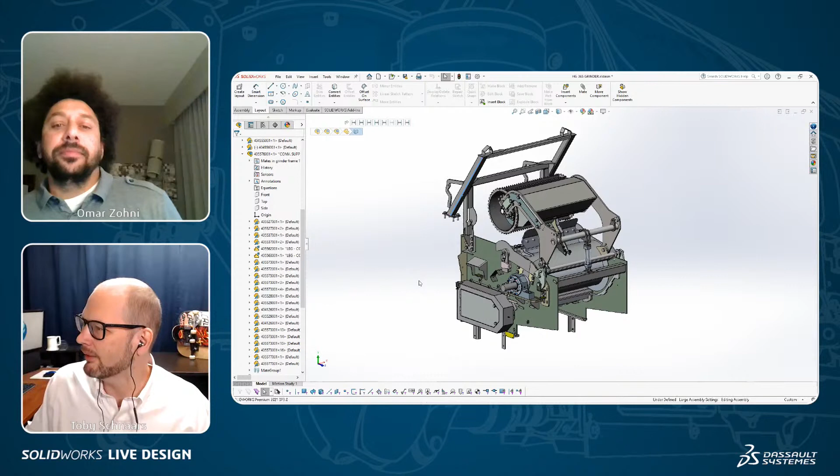I don't know what this looks like to me. It looks like maybe an old printing press or something. Yeah, so it's actually a wood grinder, right? So the intent is the wood gets fed in up here, and this thing can pivot depending on the size of the wood, and then it gets ground down. Okay. I like it.

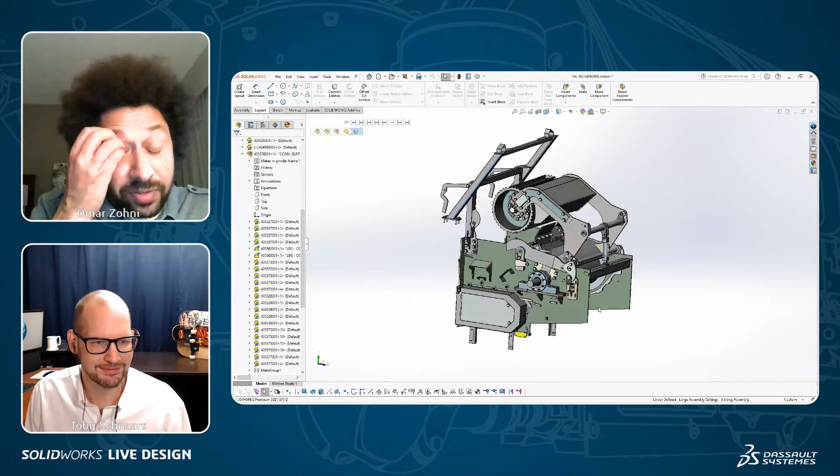And what we're going to be looking at specifically is just one of the components, right? So this arm right here is pinned at a couple spots. It's got a couple hinge constraints, meaning it can rotate. It can't really move in the X direction, so back and forth. And then it's got a known maximum load of, I think it's 2,800 pounds, that gets applied to it. So we're going to break that one individual part out and do some analysis on it.

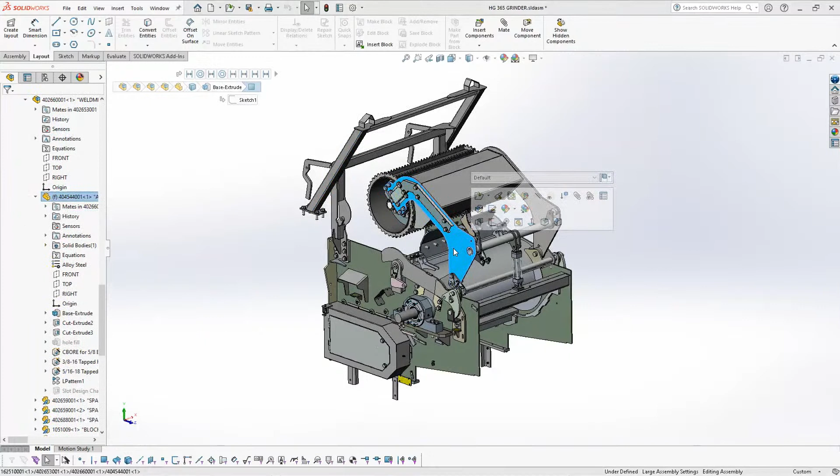And maybe you can just highlight the arm you're talking about again. This guy right here. Okay, great. So we're going to find out what we can do to minimize the mass of that part. Yeah, and so again, we're really going to be talking about the capabilities on the 3D Experience platform and how you can leverage your SolidWorks CAD geometry and the parameters to drive the design. So let me get out of the full assembly, and let's pull up the arm.

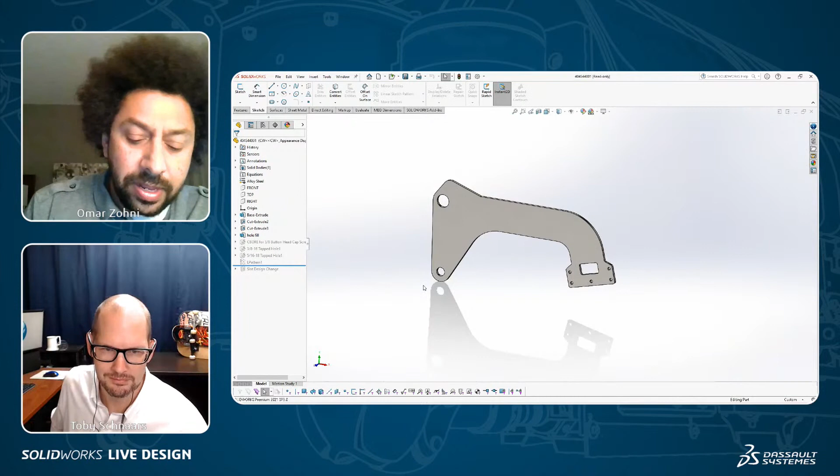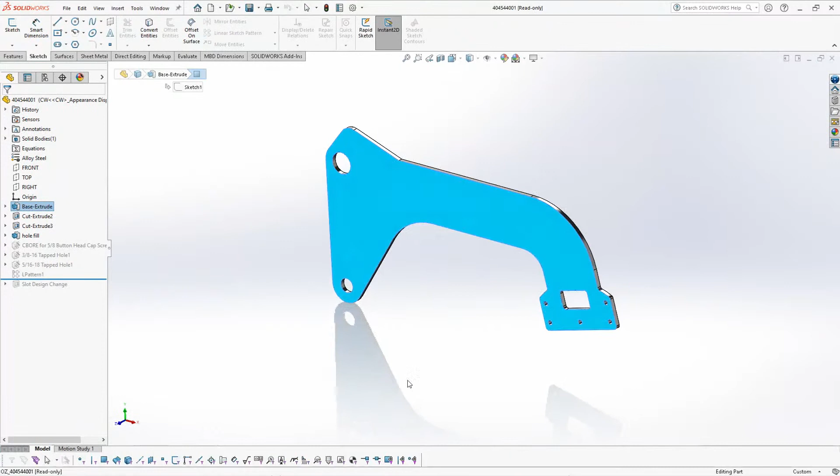So this is the arm we're going to be looking at. Again, there are going to be a couple hinge constraints on these cylindrical faces here, meaning that they can rotate around the hinge. We're going to put a constraint on one of these faces that says it can't move in the Z direction, so kind of normal to the face. And then there's going to be a remote load that's connected to these interior faces out at a distance of about 2,800 pounds.

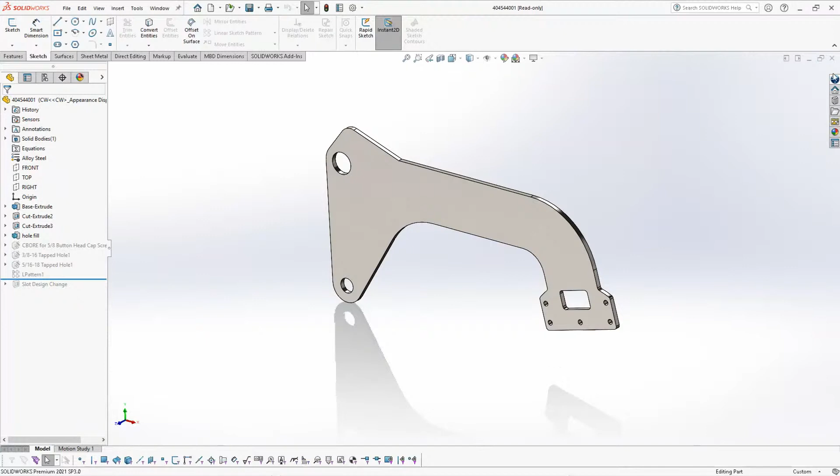And so, Toby, I'm just going to make the assumption that people probably haven't used a 3D Experience platform and haven't leveraged SolidWorks geometry. The integration between SolidWorks and the 3D Experience platform has been getting stronger and stronger. So it's very easy to just take this part, and you can see that I'm calling this thing revision A. A bit of a spoiler alert: there's going to be a revision B that we work on after we take a look at some of the results from Rev A.

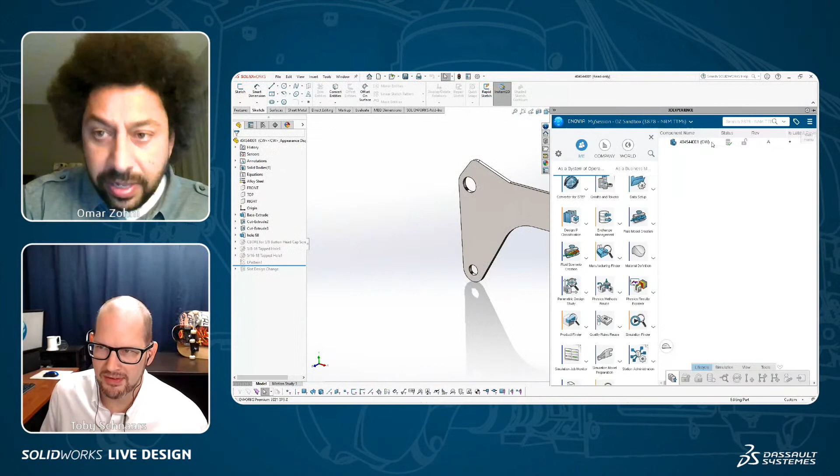But really, you just save this part to the platform, and then you can go ahead and open the part using any of the relevant apps. In this case, we're going to be using the mechanical scenario app, which is just the SIMULIA app that we use to define our finite element analysis. So you're saying you're right within SolidWorks here, but you're accessing the 3D Experience tools over in the task pane, and that's giving you access to all the power of SIMULIA, based on what your company has.

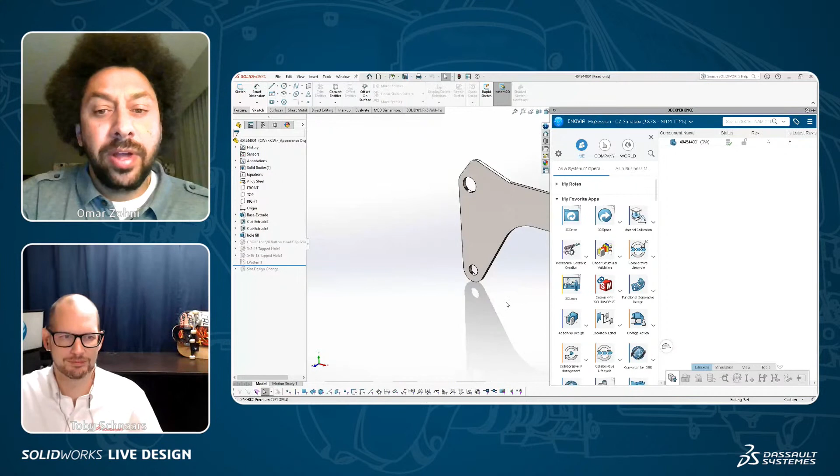Yeah, and so this can be a little bit busy, I apologize. Depending on what apps people purchase, that's what's going to be available here. And obviously, as an internal employee, we have access to a lot of apps. But the one that we're going to be working in today is the mechanical scenario app. So let's go over to the platform, and that is right here.

So this is, you guys can see that? Oh yeah, that's looking great.

Yeah, so I pulled the model over. I don't want to spend a ton of time going through finite element analysis, but this is a real simple setup. We're using an alloy steel. There's a really nice fully populated material library that comes with these tools that's got materials with fatigue data if you're doing durability analysis. It's got a full host of metal materials, some hyperelastic materials, both with and without plasticity behavior. So in this case, I'm assuming this guy is made of alloy steel, and I'm leaving the plasticity on. So if it does exceed yield, we would get some plastic deformation.

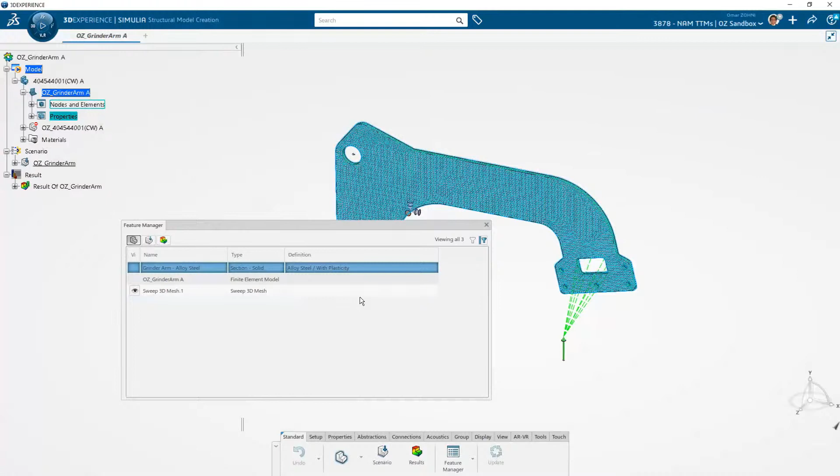And the other thing that you'll notice if you're a traditional SOLIDWORKS user is that we've got a brick mesh here. One of the things that people using SOLIDWORKS often complained about on the simulation side was the inability to create swept brick meshes. In finite element analysis, bricks can be a little bit better to use in some cases. Numerically, they're a little less computationally expensive. And for a structure like this, it just makes sense to use the brick elements.

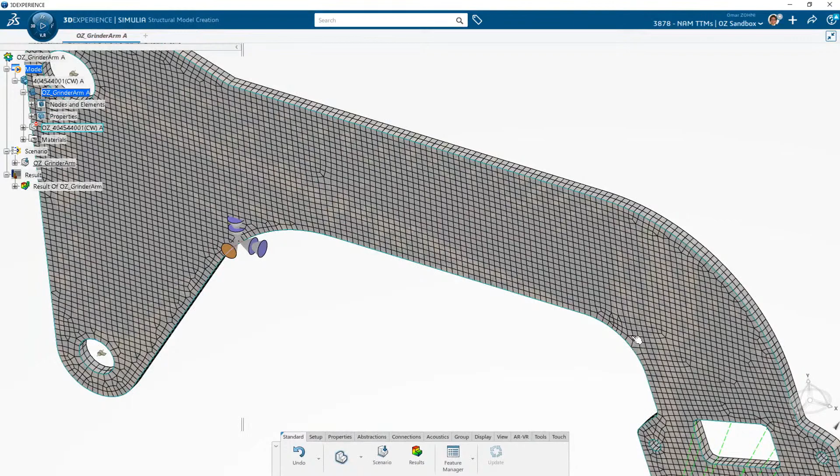So there's a whole host of types of elements available in SIMULIA that you didn't get with SOLIDWORKS Simulation. There are also a whole host of material models and element types. So not just brick elements, but some element types that are specifically good for hyperelastic. There's reduced integration. So there's a lot of bells and whistles available with the SIMULIA solvers.

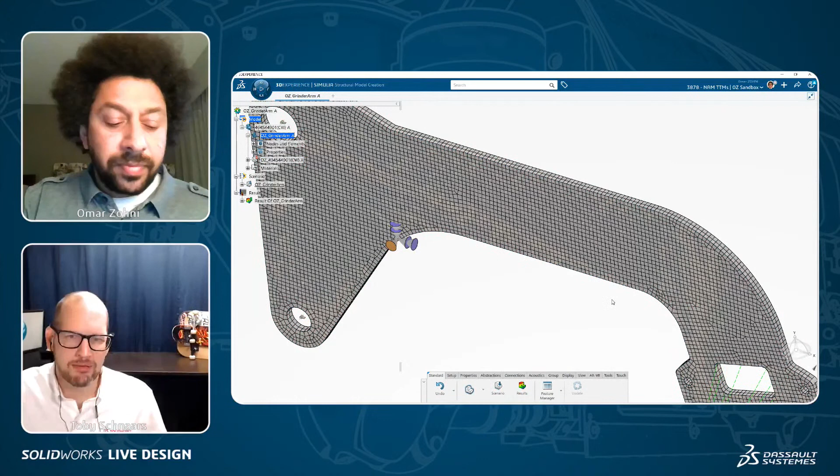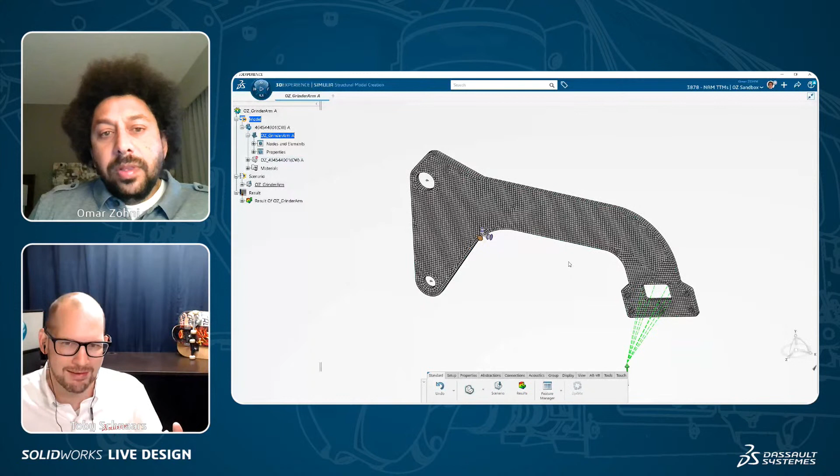Yeah, I would say that even just what you've described so far, normally if you're first getting into SolidWorks Simulation, you learn that you can deform a piece of geometry to the point of yield. As long as you don't exceed that point, it will, in theory, return to its original shape. But once you go beyond yield, all bets are off, and now you get into nonlinear studies and some pretty advanced stuff. But it sounds like a lot of that is accounted for right out of the gate with the 3D Experience library, because plasticity is included as part of the material definition for some of these materials. Is that right?

Yeah, absolutely. Anybody who's doing finite element analysis has probably heard of the Abaqus solver. That's the underlying solver we're going to be using here. This model doesn't have contact, but there are a lot of niche things that the Abaqus solver is very good at. Explicit dynamics is one of those things. Complicated contact modeling. So with SolidWorks, where you might have to specify a bunch of contact pairs if things are coming into contact, you don't have to do that.

So it automates a lot of that, whether it's plasticity behavior or contact. There are just a lot of things that are automated to make this a lot more user-friendly for more advanced types of simulations. And even with regards to the brick mesher, I mean, with a tetrahedral mesher where you've got a four-sided element, we would normally say on a thin model like this that you really want to have like 3 or 4 elements through the thickness.

When you're using a brick mesher, are you able to get away with only having 2 elements through the thickness? Yeah, you can get away with 2 or 3. And there's also some element formulations that would allow you to even get by with 1, in a case where you've got bending. So the brick elements allow you to get away with a little bit less through the thickness than

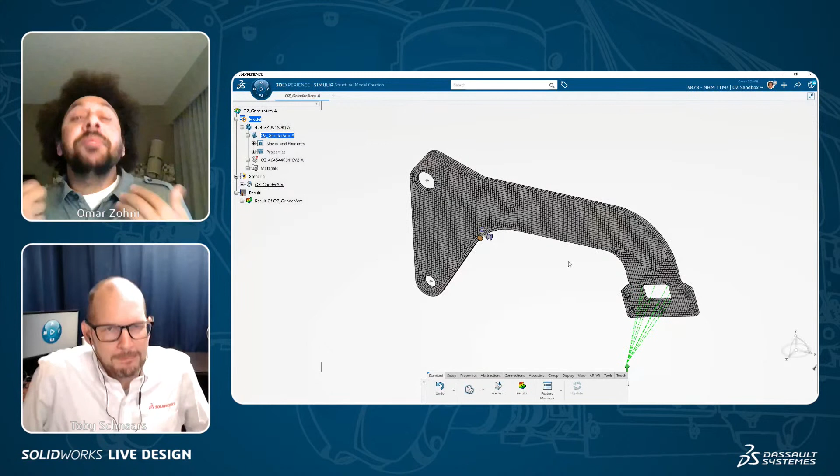a TET does. Now, the downside of bricks, and the upside of TETs, is you can mesh any generic shape with TETs and just fill it in. You can't do that with bricks, right? So there are situations where both of them make sense, and you can mix and match here. If you had an assembly, not everything has to be modeled with bricks. You can have parts modeled with TETs, parts modeled with bricks, and everything kind of works together.

Well, that's great. I see that SHAD in the chat was asking about some of the benefits of the brick mesher over the TET mesher, and I think you did a great job of conveying that. And I think it's also a nice opportunity to remind all of our SolidWorks friends out there that one of the big advantages of 3D Experience is that you get everything that you're used to in SolidWorks.

You saw that Omar had that beautiful SolidWorks assembly up and running, but then you're able to augment that with some great new functionality just by being able to hand off, right within the task pane in this case, to 3D Experience. And so now you're opening up the doors to all these amazing tools that you're not going to find in SolidWorks, that you're only going to find in SIMULIA, just by doing basically a right mouse button save in the task pane and getting to that new set of tools.

So I think it's always important that we share some of the things that we've discovered so far about 3D Experience in that context of, we can do a lot in SolidWorks, we can do a lot in simulation, but we can do even more in SIMULIA. And here's just a few examples of what some of those things are. Yep, absolutely. So you want me to walk through this setup a little bit more, Toby?

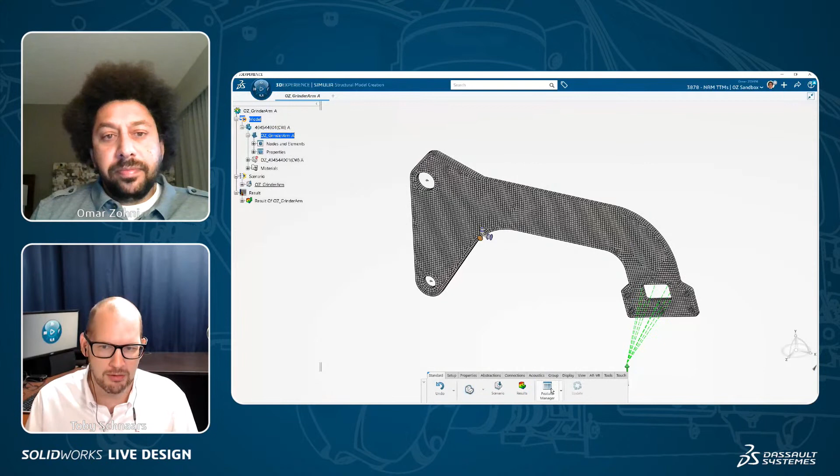Yeah, in my experience, the first thing you do is you assign material. I think you've covered that you've assigned material. Next thing you would do would be to set up the fixturing for it, right? Have you already set up the fixturing for this one? I have, yeah. And we can just kind of walk through that. So I've set up my scenario, and like I said, let me just highlight a couple of these.

So there are a couple hinge constraints, and you can see the face is highlighted in blue here. So there are 2 hinges. Now, how many degrees of freedom is that locking down when you assign that hinge restraint? So it's basically locking down all the degrees of freedom except rotation. It can only rotate about this face. Okay, got it. No axial translation, no deformation of the nodes on those faces, external from the axis. No, right, exactly.

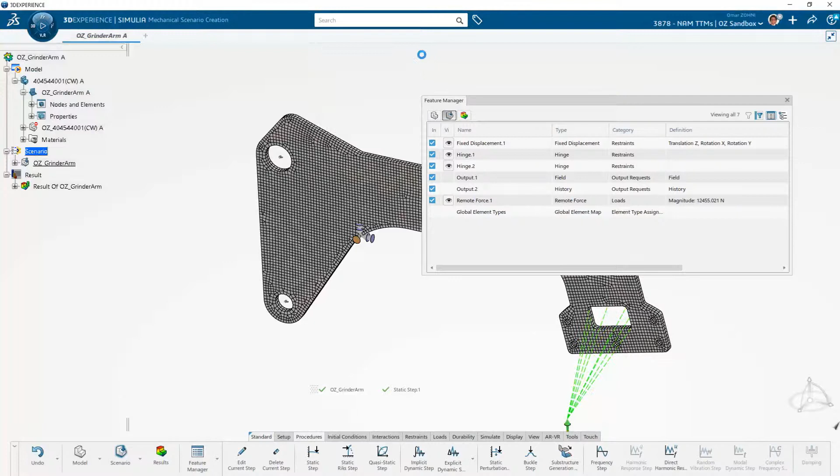And then really the only other important, well, there's a fixed, let me back up here. There is a fixed displacement on one of these faces. So there's a constraint that's basically saying this face has to remain coplanar, flat. Yeah, right. Exactly. And then we just have our remote force that's applied to these 5 or 6 faces that cut out at the bottom, and it's about 2,800 pounds. We're working in the metric system here, so it converted it to newtons, but I believe it's about 2,800 pounds. And we can see the direction of that force.

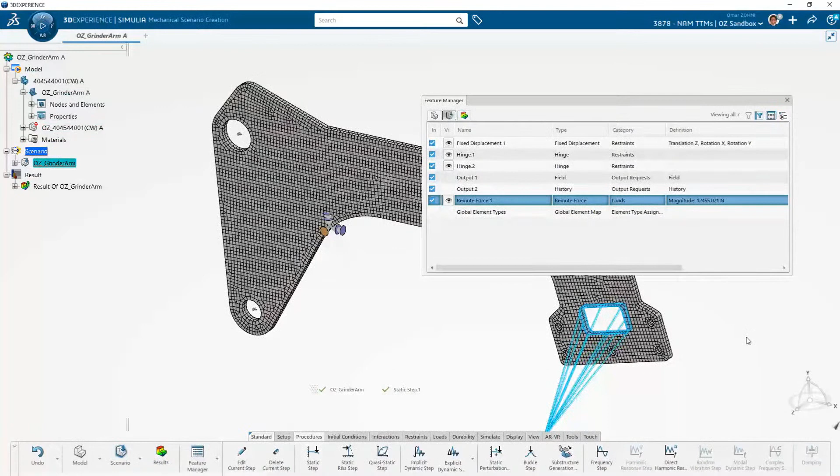Is that fixed displacement on that planar face because this thing is up against a wall, or what is that simulating? Yes, so it's up against some components that are gonna hold it flat. Okay, got it.

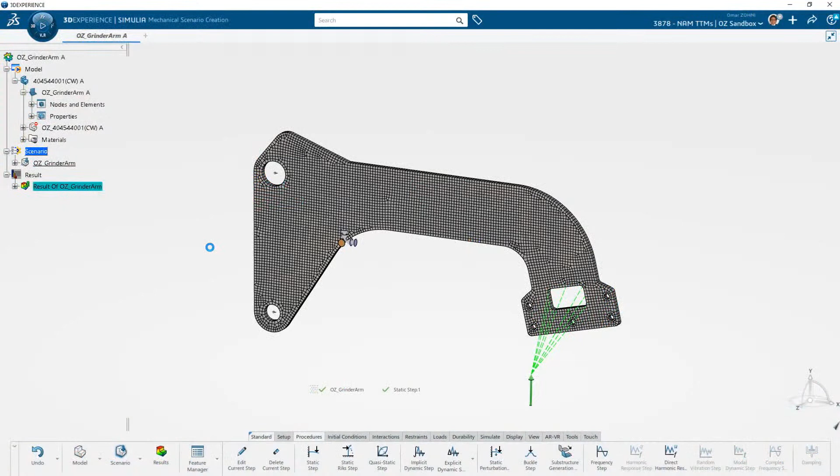Okay, really, that's it. So then we can go ahead and run this. And for the sake of time, I have the results here, so let's just pull up some of the results, because once we see the results, it'll make more sense what we do next and what we decide to do.

And these are just the pre-populated, like it automatically shows you von Mises stress, but sometimes people want to look at principal stresses or axial or directional stresses like sigma X, sigma Y. So all of those are available. It just depends on the type of industry that you're in. But a lot of times people are most interested in von Mises stress, so that's the one that gets plotted by default.

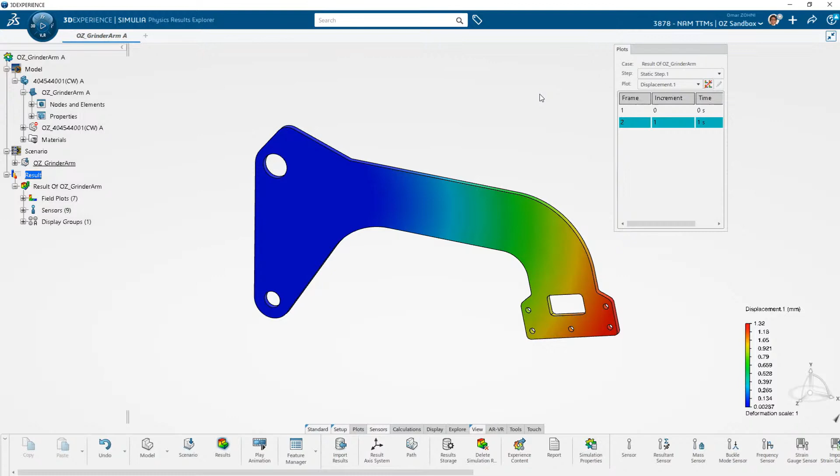But anyway, okay, so now we've run this guy. We can see that it's really over-designed. A factor of safety of 7 is just way too high for something like this. You could probably get away with a factor of safety of 2 or 3. And because we can see, if we look at the von Mises stress, this area here of low stress, a real simple thing that we could do to reduce the weight would be to go back to SolidWorks.

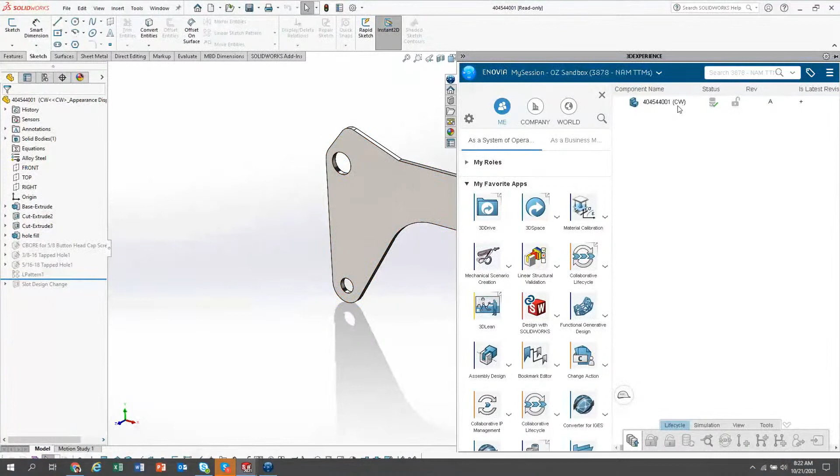See, and this is what I would do: I would end up going back into SolidWorks and trying to sketch that same shape, and then just remove that shape. Just try and get it close, and then I have to set up the whole study again and run it again. Yep. So what's nice is we don't have to do that here.

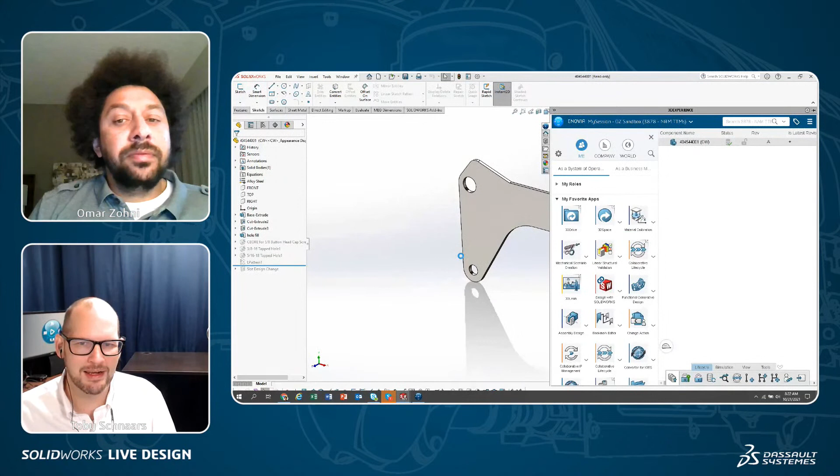So I'm going to go to my revision B. Okay. There's a little bit of data management in the cloud here, one revision for another. And you can see what I've done is I've added a slot. And the slot has a couple parameters that we can vary. One is the width, one is the location, which is how far down it is from the top, and the other one is the length.

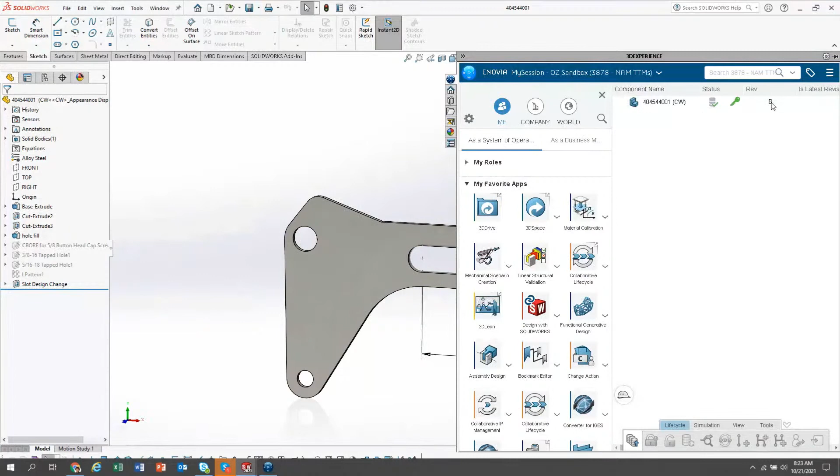So I kind of guessed at what the width, the location, and the length should be as an initial. And what I'm going to do is run a parametric study and vary those to see which one meets my design criteria while also minimizing the mass. So we got my Rev B now. Again, I would do the same thing, kick this up to the platform. It's going to know that it's a revision B.

And after I've run this analysis, there's a way that I can say, look, I want to create a new revision of this analysis, and it will make all of these Bs, and then I can just replace it with my B revision. Oh, wow. Yeah, so I don't have to really re-set up the model. I just copy that A rev to a B revision. So let me just pull up the guy. Yeah, I could definitely see that saving time.

Yeah, tons. Obviously, I've been using these products for quite a while, so I have a lot of models here in my space, but I can filter it down to my simulation content. And you can see, oops. So that's my Rev A.

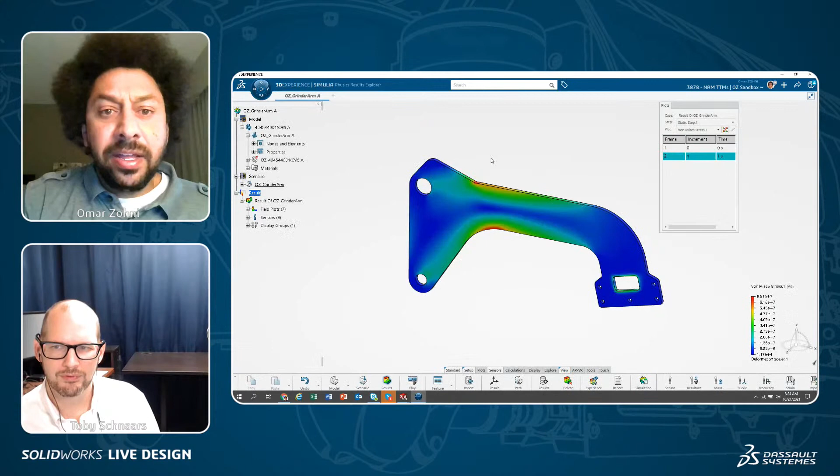Oh, crap. Sorry, guys. Oh, all good. I swear I've done this before.

It's all good, man. And this is interesting. So ultimately what you're saying is that you're going to be taking those parameters that you specified, like the slot width and the slot location and the slot length, and then you're going to be essentially pitting them against some design criteria. Can you pit that against like factor of safety?

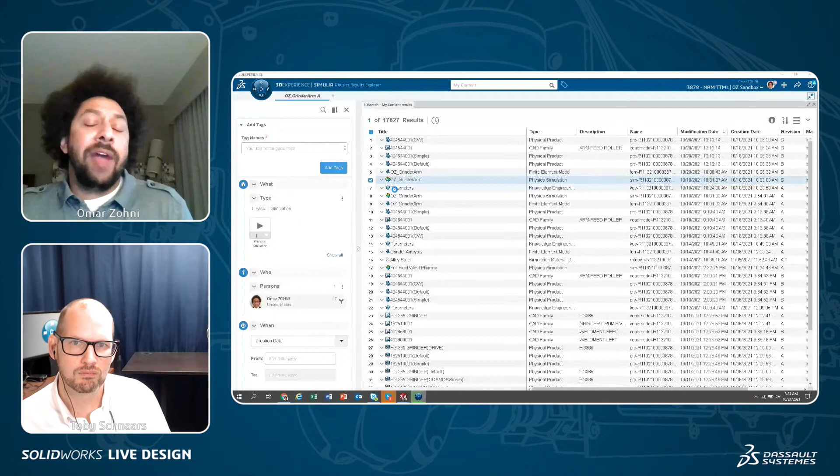Yeah, absolutely. So basically, you flag any criteria that you have to meet. So for a structural analysis, it's going to be things like factor of safety, displacement, stresses. It could be frequency, if you run a vibration analysis. It could be temperatures if you are running thermal analysis. It could be a combination of those, right?

Oh, so for a temperature one, you could figure out what the optimal wall thickness is in order to prevent certain temperature from getting through, or for insulation purposes. Yep, absolutely. Wow, so that would be helpful.

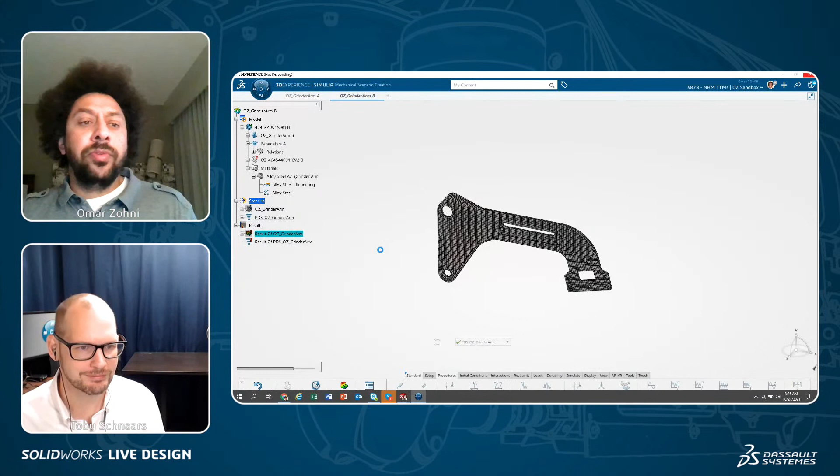Let's pull up. So again, all I've done is I've replaced it with a revision B. Oops. I don't have to reset up the simulation. I just basically go ahead and run it.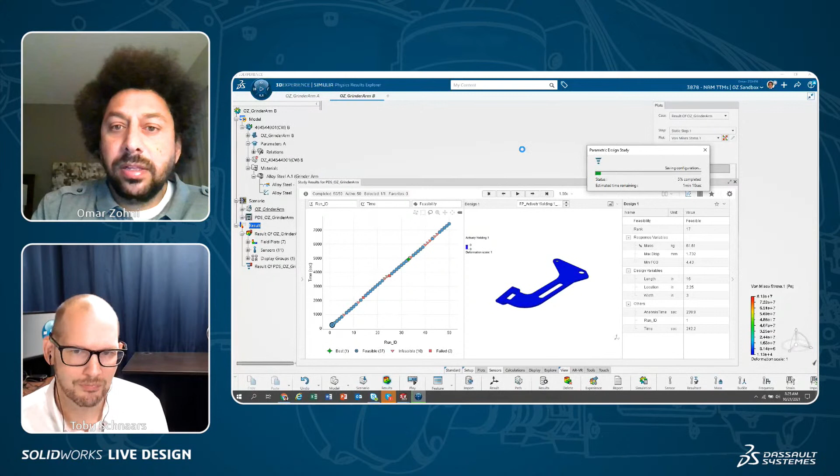So maybe while this is running, you could just address real quickly, what's the difference between this parametric design study and a generative design? So a generative design, at least when I hear that, I think topology optimization, right? Where you're really not as constrained by geometric parameters. You're just kind of saying in this space, this body can reside. Here are the forces it's going to see, and come up with whatever shape you can to meet the criteria, right?

Yeah. Okay. So I think I've seen them before, where they'll say, I want to make a bracket to hold up a shelf, and you just say it's held here and it's held here, and then it creates almost an alien structure that's holding it up, a super crazy freeform structure. That's the result that you get from a generative design, right?

But that's not really what we want in this case, because we're a lot more constrained, because this is a piece of machinery. It's one piece in an assembly. It has to fit in with other pieces. So in this case, it would be more appropriate to do a parametric design study. Absolutely, yep. And I'm just gonna solve this again.

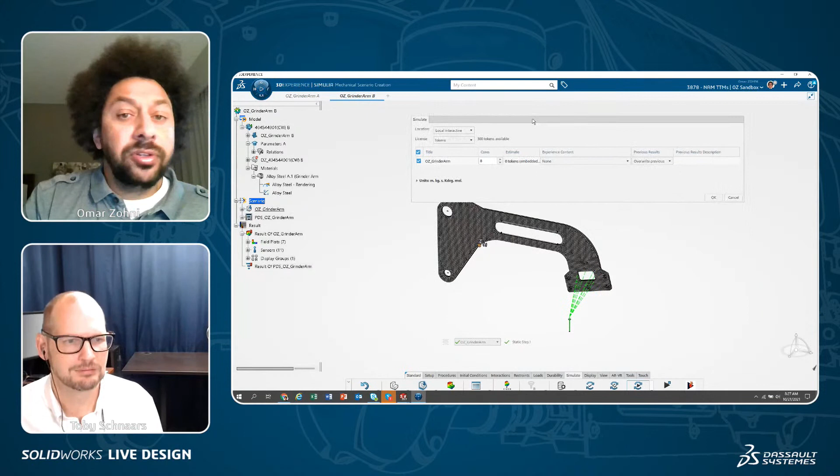It looks like sometime in the last day or two when I was working on this, the data for the simulation got mismatched from the actual SolidWorks model. So this is great, though. You guys can see exactly how long it takes. All I've done is hit update, which just updated the mesh to reside where the geometry is. And now, right out of the box, first of all, you can solve on 8 cores with these products. Okay, I like that.

Yeah, and those 8, you can run locally, or I can run it in the cloud. So if you don't have 8 cores on your machine, or your machine is a little slow, or you just don't want to take up the computer resources because you want to do something else, I can just say I want to run in the cloud, again on 8 cores, default out of the box. And if you wanted to run on more than 8 cores, then you would have to buy computing credits or tokens.

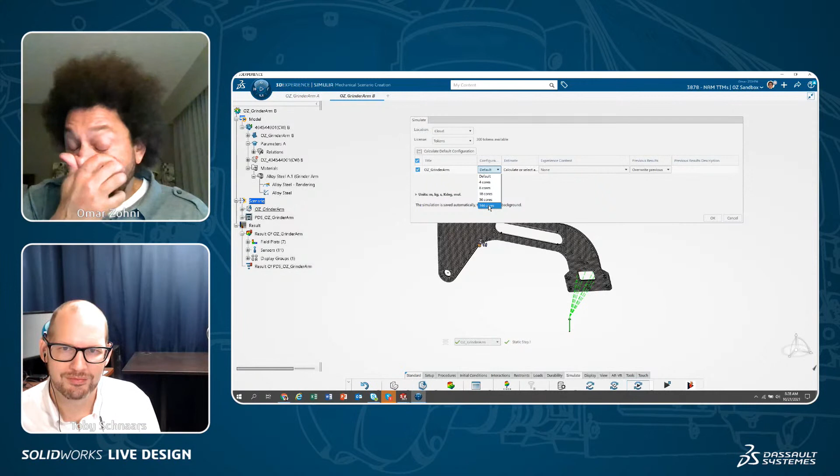This is a way to really speed up your simulation times, especially for complicated models. For a model like this that's not super complicated, just a linear analysis, you're not going to get a major speed up. But if you're running an explicit dynamics analysis or a really complex nonlinear analysis, running it on more cores is really going to speed it up. Yeah, running on that entire assembly. I got excited when I saw that 144 cores.

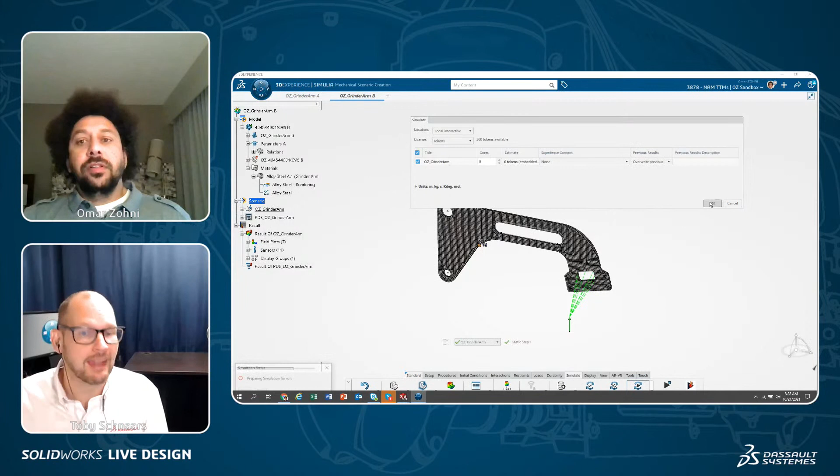So what you're saying is that anybody who gets this product gets access to the 8 cores, you're able to do your solving, it's all good. But if that's not enough for you, we do have options to help you upgrade to get access to more cores. Absolutely, yep. Okay.

So I just fired this off and asked it to solve again, and within 30 seconds, 45 seconds, this thing is going to run. And again, I'm running it locally. Now, the assumption with these solvers is that everything's nonlinear. So if you've used SolidWorks Simulation in the past, you know you can kind of control the times or the stepping in a nonlinear analysis. You can do the same thing here, but I think I'm just asking it to solve it all in one step. This is a pretty simple analysis here.

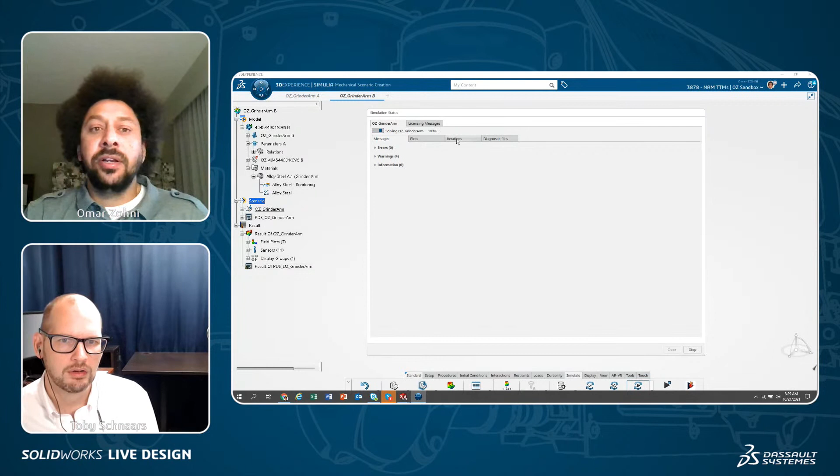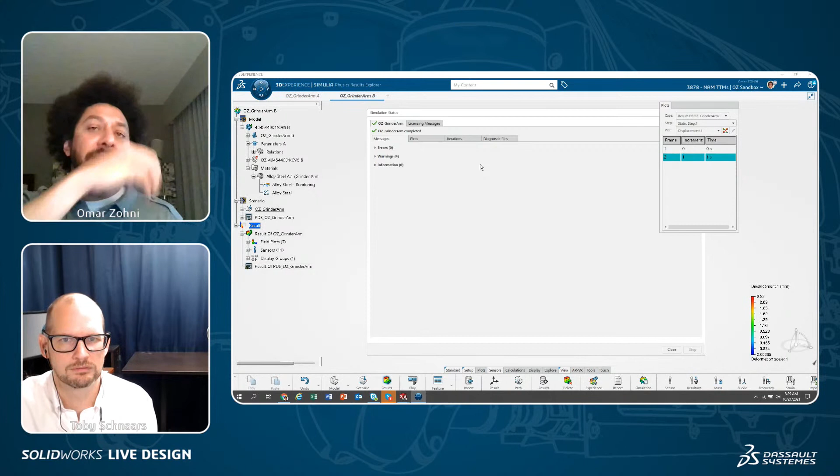So what you're saying there though is that when something solves as a nonlinear study, you're assuming that time is a factor? So with nonlinear, there's kind of a pseudo time, right? So time represents kind of percent of load application. A lot of times with nonlinear analysis, because it's path dependent, if you apply 100% of the load all at once, it's going to look very different than if you apply 10% of the load incrementally. So the response is just not linear.

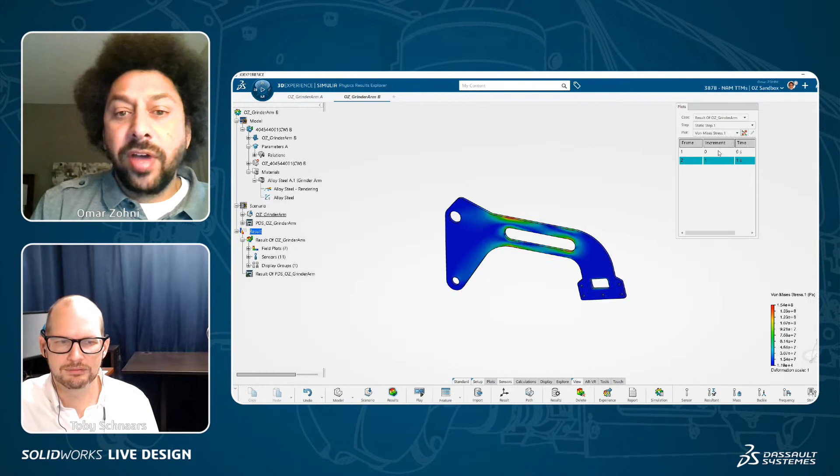Got it. Okay. So then you have the ability to, like, a time of one. We're not really running this in a transient nature. A time of 1 second just means 100% of the load has been applied. Right. Okay, I got it. All right, so here's our results. I don't know if you guys remember, but the displacement I think was about 1.3 in the model without the slot. But we could look at von Mises stress. We can look at factor of safety. So you can see my minimum factor of safety now is down to 3.07.

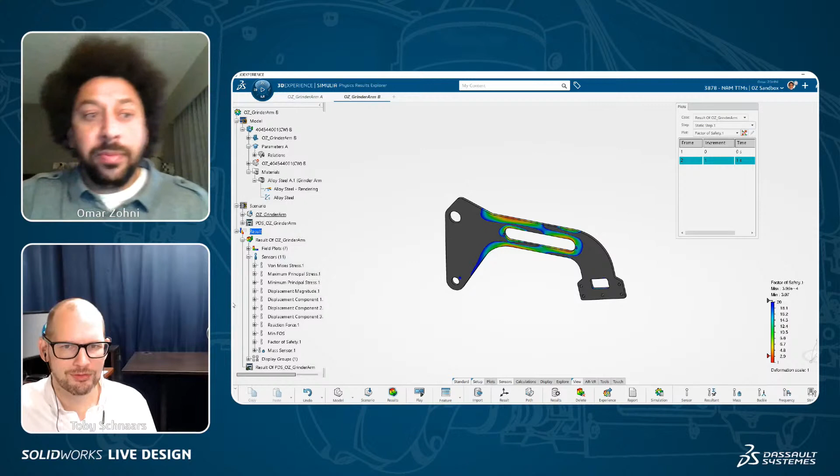But basically what you do is, you run your parent study, right? This is the model that I want to do a parametric study on. And there are a bunch of sensors that get created by default. And these sensors are basically what are used in your PDS study, your parametric design study, as design variables. Now, also, there's what's called a parametric bridge. And you can see that's where my location, my width, and my length are. So any parameters that I set up in the SolidWorks part are going to be ported over here. These are the parameters I'm going to be using to run that parametric study.

Sure. And you can see I've got sensors for the minimum factor of safety, my maximum displacement, and there's also a mass sensor, right? So those are the three that I'm really going to be focusing on when I run my parametric study. Okay. So again, you run your first analysis, and then you create what's called a parametric design study. So I'm just going to come back.

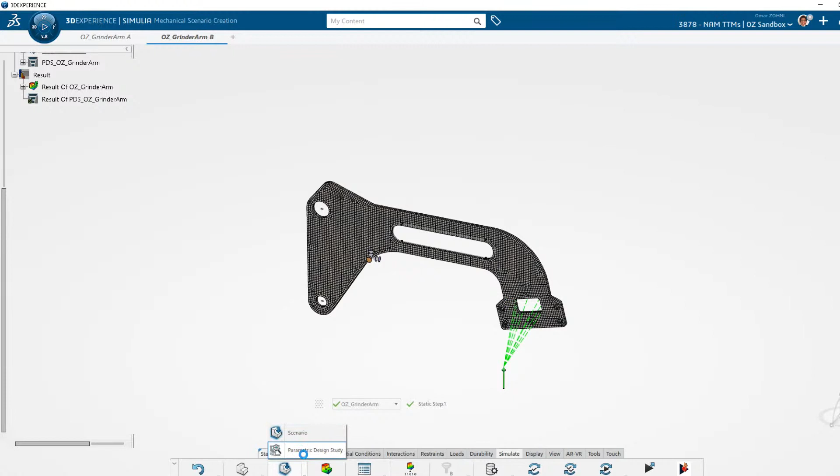I don't want to get lost in some of the minutiae here related to the platform, but these are the different apps, what's going on here? Sorry, guys. That you're going to be hopping through. So there's a modeling app, a meshing app, and then in the scenario app, you can see there's a parametric design study. So I'm just going to activate that parametric design study. I've already got this set up, so let's talk a little bit about it. I've specified my design variables, location, width, and length. I'm specifying the min and maximum, and I'm putting in a step size.

Now, you don't have to put in a step size. If you don't put in a step size, it will, not randomly, but it will kind of take a guided approach to looking between your min and max values. Okay. But oftentimes, it's not like you're going to build something and want the location to be 2.1375, right? Oftentimes you want it to be whole numbers.

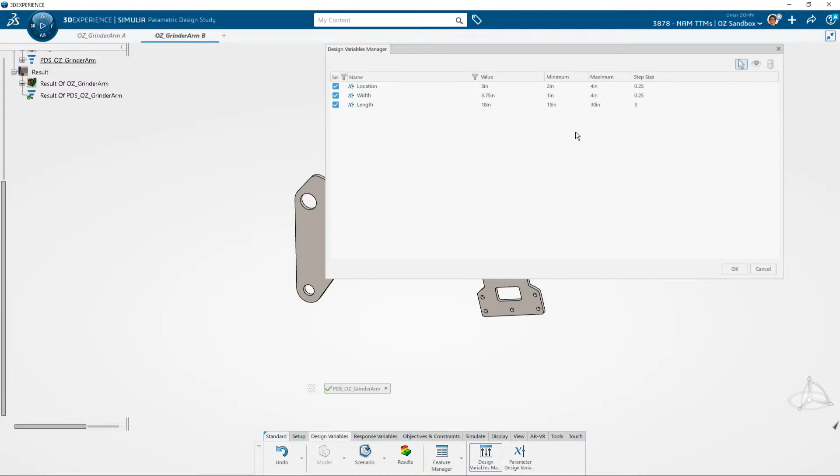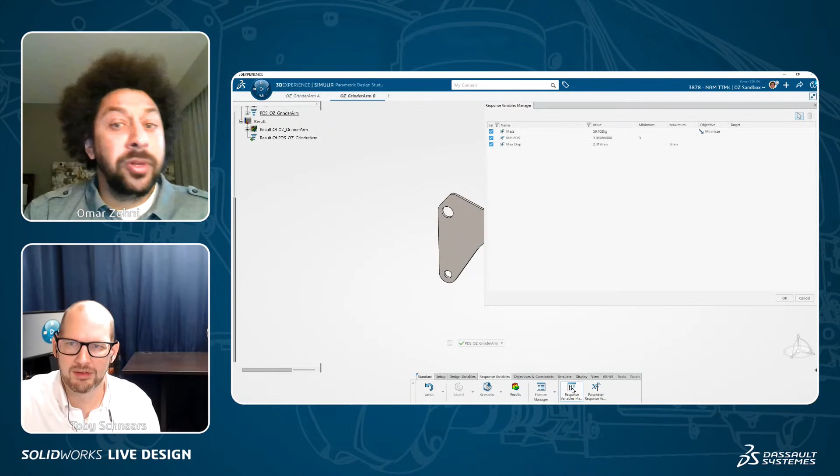Yeah, like in this case, maybe it'll start in the middle. So maybe it'll start at like 3, and then it'll go down to 2.75. Then it'll go up to 3.25, then 2.5, then 3.5, and kind of figure out the optimal, I guess it's going to be doing a combination of all 3 of those variables. Yeah, absolutely. So you've got those 3 input variables. Then my response variables, I'm just pointing to those sensors, right? And what I'm saying is, look, I want the minimum factor of safety to be 3.

I'm not going to limit what the max is, but there can't be a value under 3 or else the design is not feasible. And I'm also saying that I want the maximum displacement to be less than 3 millimeters. Okay. So those are 2 design constraints, right? If any of the runs don't meet that criteria, then it's going to highlight it in red and say that they're not feasible.

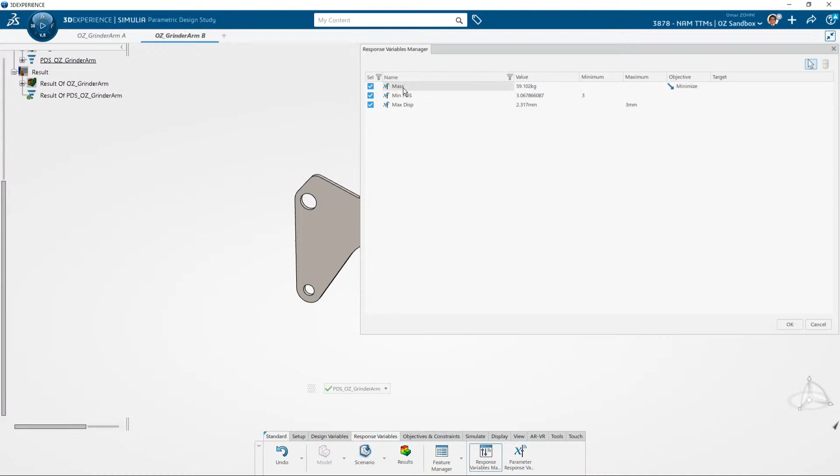And then the goal is to minimize the mass, right? Exactly. Let's get this thing as light as possible. Yep. And then in our simulate tab, we could specify how many points we're looking for. So in this case, I told it, look, run 50 points. And let's take a look at the results.

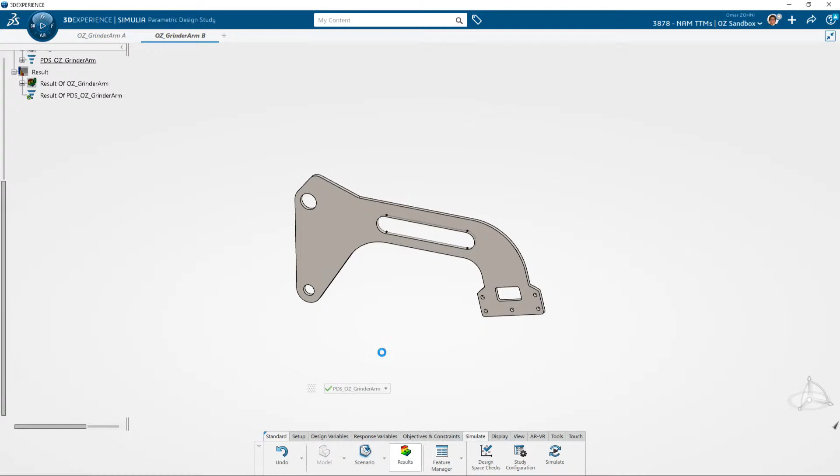Looks like you might have to run it again. No. That would definitely take way too long. Got to bust out that 144 core credit.

Yeah, so here we go. This kind of interface comes up as you're running this simulation, and it's very, very cool. So you can see here are my 50 points. We're going to configure this a little bit, but there are 37 points that were considered feasible. That means they meet our requirement.

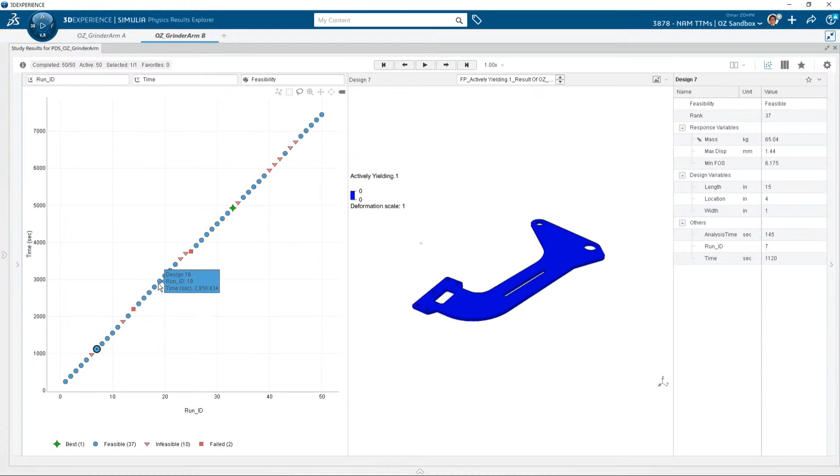And if I click on any one of these, so let me just click on one. The slot changed. I saw it. Yeah. So if I click on any of these, I'm going to have the results that I'm interested in. So up here, you can see it's changing. It's showing me what the maximum displacement is, the minimum factor of safety, my design variables, what they're set at. And I can walk through and take a look at all of those plots.

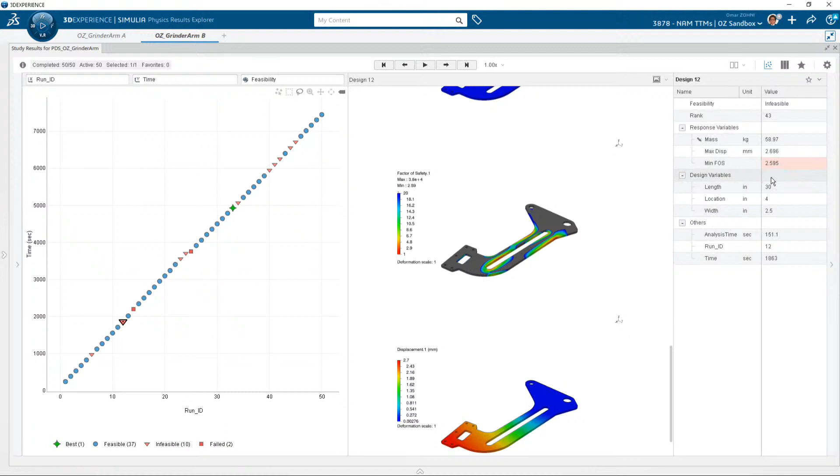So here's my factor of safety. I can see my minimum factor of safety is 3.44. So those are for all the runs that are feasible. Now, if I click on any of them that are infeasible, one of these response variables is not meeting the criteria, right? So I think I said I want my minimum factor of safety to be 3, and this is only 2.5, right?

And then what's the difference between that and failed? Okay, so failed means that there was a problem with the geometry update. So maybe it was deleting a face, or the width was too big, so one of these faces went away. So failed is different than infeasible. Failed means something happened and it didn't actually run the simulation. Because some combination of those dimensions at their maximum ranges caused it to blast the whole face off or something like that. Yep. Okay.

And then there's infeasible, which means it didn't meet one of the criteria. Feasible, it meets all the criteria, and then it highlights what it feels like is the best. Okay. Let's see it. So it's the big winner. So design number 1, the weight was about 61 kilograms. I think in the original design without the slot, it was 66 kilograms. Okay. So design 1 with the initial slot 61 and then down to 58. So it's cutting 5% of the mass out just in the slotted configuration, which if you're making a bunch of these, it matters, right?

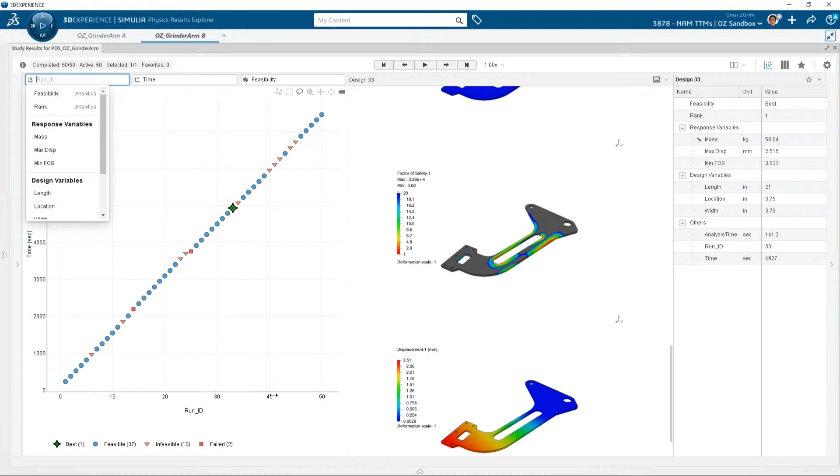And the other thing that's really cool is, right now the x-axis here is just the run ID, not really useful, right? You don't care if it's run number 1 or run number 50. So what I can do is change that x-axis to, let's do maximum displacement. Oh, wow. And then you can see, anything over here fails because the maximum displacement is too high. And then I can change my y value to something like mass.

So it's cool, right? You can see all these guys that are red are failing. And you can see generally as the mass goes up, the displacement goes down. Which for this one single variable we would expect, but I could see there being other studies where that would be super insightful. Yeah. And now I'm plotting maximum displacement and minimum factor of safety, right? So here, this is the red zone, where it's violating one of those two, or here where it's violating both. Mm-hmm.

And then here's our ideal point. And then on top of that, I can walk through any of these. I can right-click on any of these and say, look, I want to add that to my favorites. If I want to compare a few of them, maybe this is just a little bit too close to the displacement or the minimum factor of safety, right? It's super close to 3. So maybe I don't want to use that one. So I can flag a bunch of these.

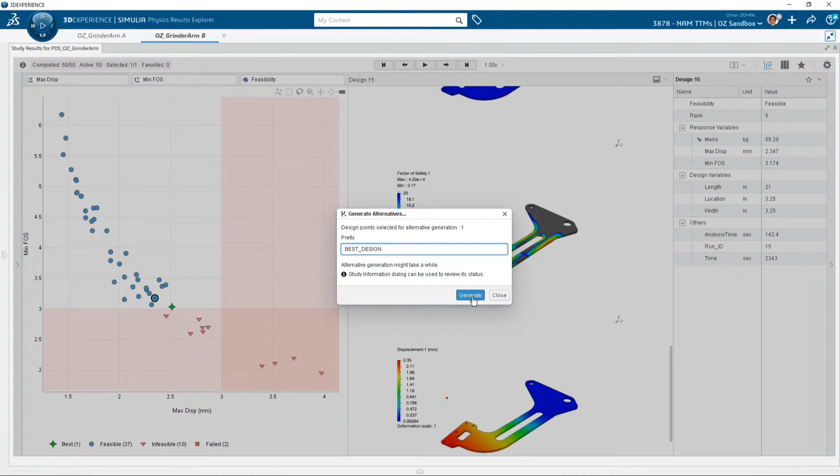I can also say, look, I want to generate an alternative. And what that will do is, I can add a prefix, so this will actually generate that geometry that I can open in SolidWorks. And then if I wanted to, I could actually replace the part that's in the assembly with this optimized design, right?

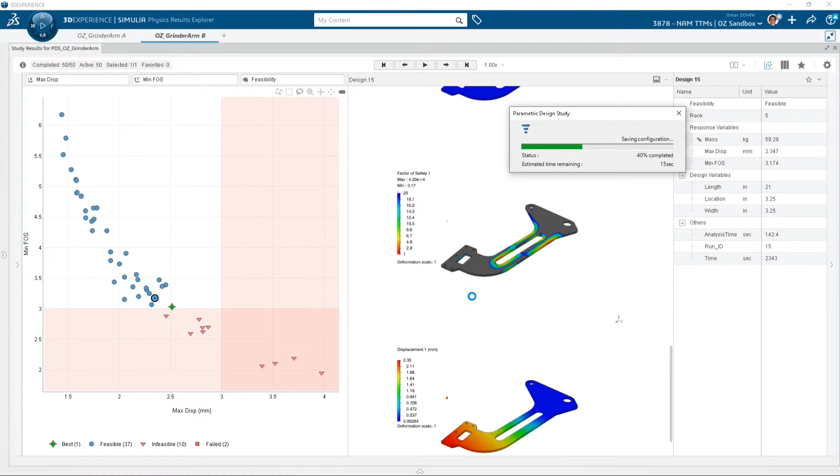So really powerful technology. And again, all integrated with SolidWorks, right? So really easy for me to go and push these changes back to SolidWorks. If I make a change on the SolidWorks side, it's easy to push those changes back up to the platform.

So at this point, I think this is what you just said a moment ago. I just want you to reiterate, now that you've got that design, you've determined which one is the best, what does it look like? You don't have to necessarily do this, you can just talk me through it. What does it look like to then get that geometry back into SolidWorks? So that's what's going on right now. You just right click on the design you're interested in and say you want to generate an alternative.

Okay. And that will generate, it's called a physical product on the platform, but that physical product can then be read back in to SolidWorks. And we could replace the existing arm with this version of the arm. Right back into the assembly. Right back into the assembly, yeah. Wow. Yeah, I could definitely see this being a huge benefit.

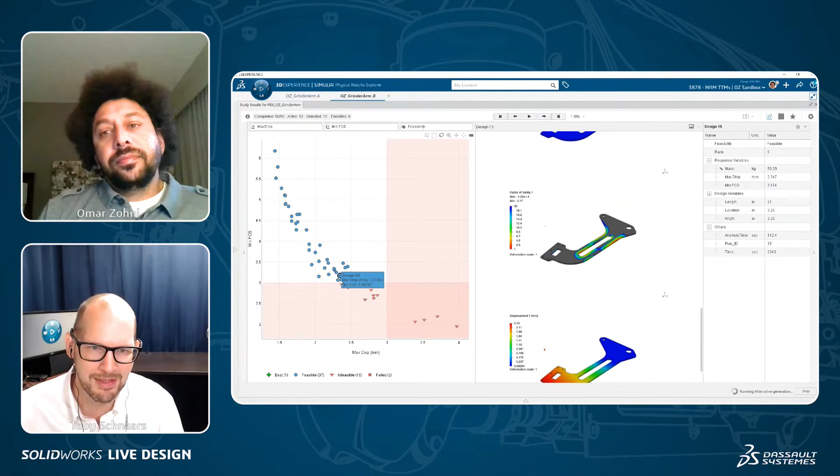We had a question from Brian earlier. He was asking a little bit more about the difference between the brick and tet mesher. I think he did a great job answering that. And Eric is very impressed by 144 cores. Says more power to the shields.

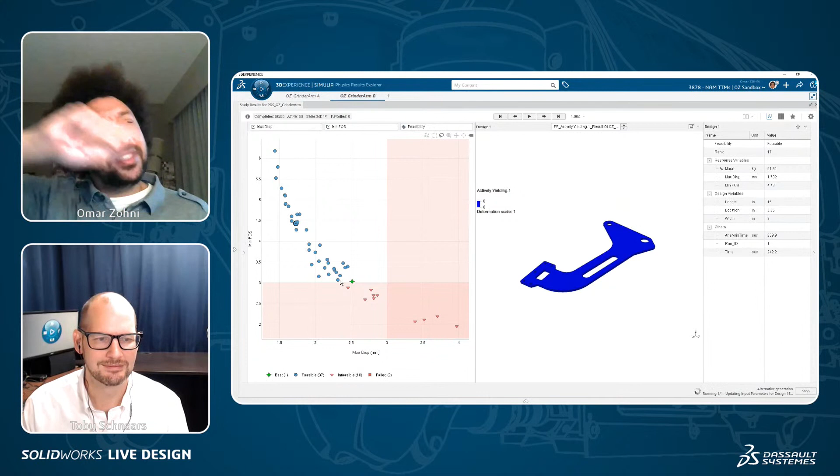Yeah. And what's great about the SIMULIA solvers is they're really written to take advantage of multiple cores. With the SolidWorks Simulation solvers, you can utilize as many cores as you have on your machine, but after about 6 or 8 cores, you really start getting diminishing returns. But with the SIMULIA solvers for large models, if it's taking 20 hours to run on 1 core, if you throw 20 cores at it, it's going to take about an hour.

Now, there's a little bit of time that you lose when it's breaking up the problem to run on those 20 cores. But in general, the solve time is going to be very linear as you increase the cores. Okay, that's good to know for estimating the appropriate amount to select.

Yeah, and this is just an example of structural analysis. You can also do this with fluids packages if you're doing CFD, which can also take advantage of this to do parametric design studies linked with SolidWorks.

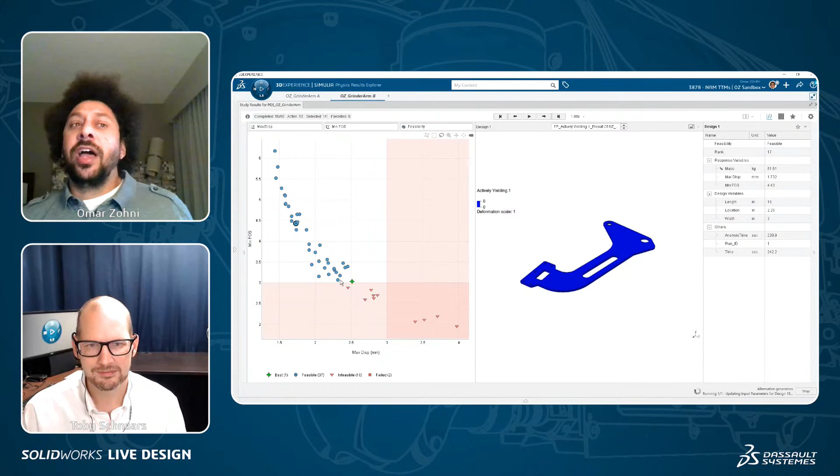Like I said, it's an interesting time to be a simulation person in this space. We're starting to interact more with the EMAG groups, so there's some EMAG products on the platform. You're saying on the platform, yeah. Radio magnetic frequency, that type of stuff. Is that what you're referring to?

Yep, absolutely. Looks like Ramesh is saying hello. He should be watching this, right? Sorry about that. I should have turned off my Skype.

So, with regards to that, it's just interesting you said that right when the question came in from Brian. He said, "Can you use multiple different physics engines to come up with these design constraints?" So, for example, could you do a flow type of study and a structural analysis and have both of those be constraints in the same parametric study? Yeah, so great question. I think right now, unfortunately, they have to be separate, but that is definitely a capability that's coming.

So you could have multiple structural analyses that kind of dictate. Oftentimes you'll do a frequency analysis and have a frequency constraint. Like you want to make sure that the minimum or the first natural frequency is above a certain value. And then you could couple that with structural, like a factor of safety, displacements. And even thermal. Something like what you described at the beginning of the show, one of your first jobs.

If something's up on an airplane and the airplane's vibrating at a certain frequency, you're going to want to make sure that your structures avoid that frequency. Is that kind of what you're talking about? Yep, absolutely. Okay. So frequency analysis could be combined with structural at this point, because they're all kind of in the same solver, in the structural domain, right?

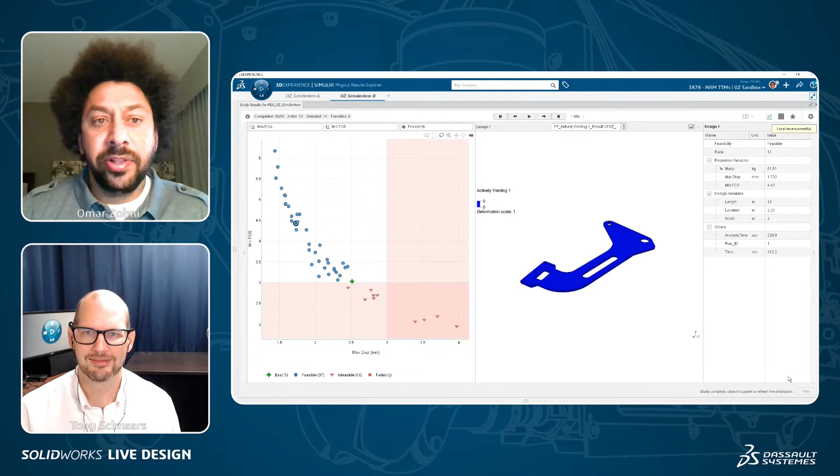So where do we go from here? So like I said, the integration with SolidWorks is getting more and more powerful, and we're getting more and more capabilities. Again, this was just an example of a structural analysis. You could do it with flow analysis, and we're gonna see more and more of those types of capabilities. Well, I can't wait to see what comes next.

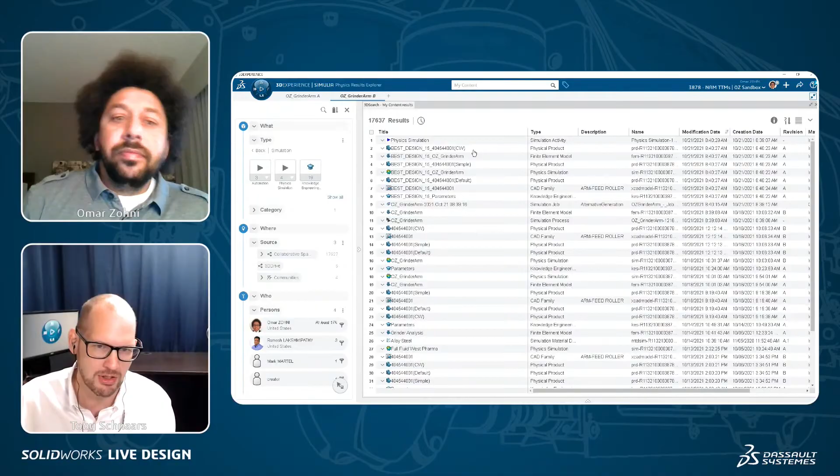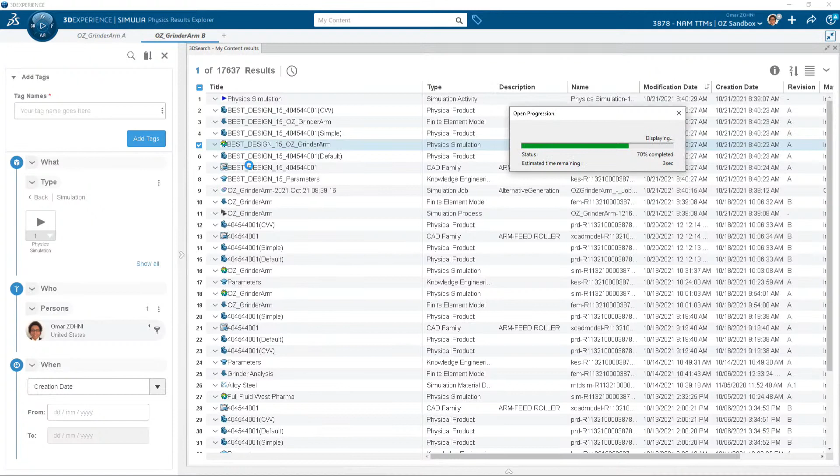Yeah, what I was gonna say is, you can see I told it to generate that best design, or the design alternative, and I added a character string, best design, at the front of it, so you can see what it did. Let's open this. So it actually sets up the simulation, because you only have access to those predefined results in the PDS study. So if I want a more granular look at that specific design, it creates a physics simulation, an FEA model for that particular geometric configuration.

So you're saying it only generates that FEA model, or it generates that and the geometry we need in SolidWorks? It generates the FEA model. It also generates the model in SolidWorks, right? Okay. So great.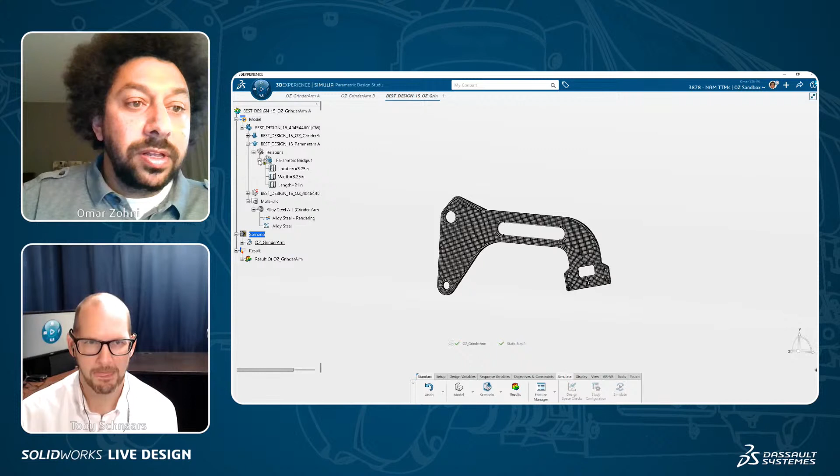Yeah, you can tell I have a real bias to SolidWorks. I just want to get everything back into SolidWorks. It's all I care about. Yeah, so let's go back to SolidWorks. It should be. I haven't tested this. It's always nice to just do things on the fly.

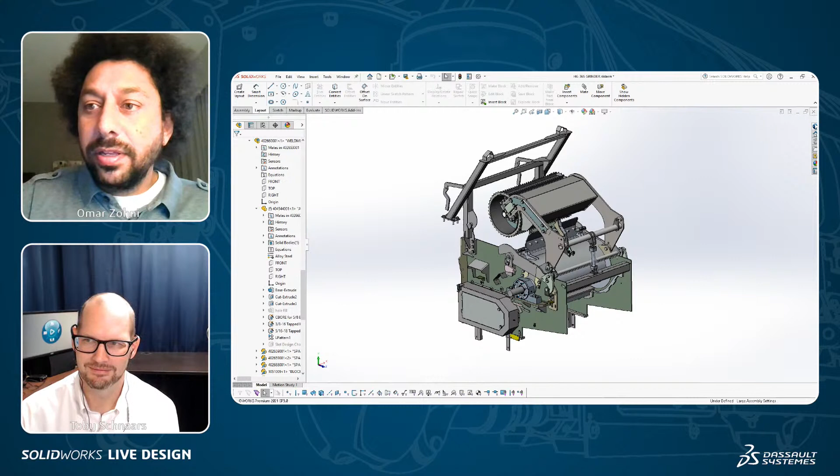Let's just make sure, let me close these guys. Okay. And we should be able to just look in that space. So let me just try to find it.

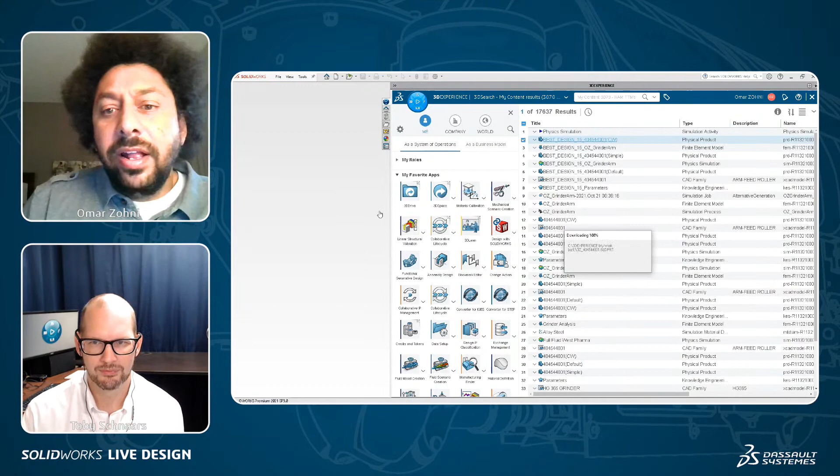All right, so best design, physical, we just want to grab that physical product. I think it's this guy, and we'll just drag it into SolidWorks here. And with any luck, this will be the optimized. That's looking pretty good. Yeah, so this is the optimized design.

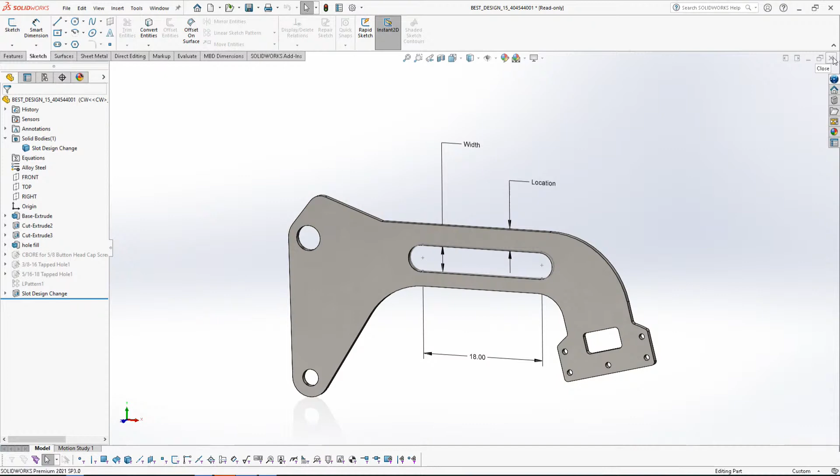Yeah, so it's really easy to, everything's kind of working together as you'd expect, right? It's just nice to see this integration between a lot of the great brands that Dassault has, right? And the SolidWorks and SIMULIA brands are just two great brands.

So it's really nice. Man, I'm just having a lot of computer problems. It always happens when you're presenting. Yeah. Friday, that's tomorrow. Okay, that's fine.

That's fine. Yeah, it's just nice to see that level of integration between these great brands, like I was saying. And as a SolidWorks user, I feel like we were just doing a huge disservice to them by not really offering some of these more advanced simulation tools and capabilities. And we're just getting more and more of that stuff available for SolidWorks users. So it's a really exciting time to be in the simulation space.

Well, I gotta say thank you so much, Omar, for sharing this with us. Jan said something in the chat. He says, "Great job. I always learn something new." And I feel exactly the same way. I learned so much from watching this today.

And I think one of the things that I always learn when I'm looking at a 3D experience presentation is just how much we can still do in SolidWorks, but then how much we can gain by leveraging some of the tools that are available to us now in 3D experience. Like in this case, so much of what you showed us there is either not available in SolidWorks, or it would just take so much manual labor.

Like imagine generating a report of all those different plots in SolidWorks. You could do it, but it would take a lot of time, a lot of exporting the results to Excel and then making those charts and graphs, which I'm sure you've done before, manually. And it's great to see that we have all these tools available for our SolidWorks users who are ready to make that next step and really enhance and go beyond.

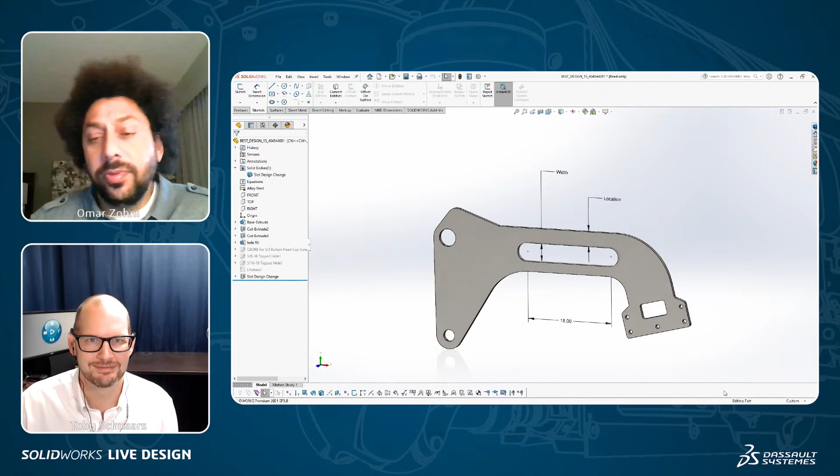It's hard to believe that there's things that SolidWorks can't do. But the more I learn about 3D experience, the more I learn wow, we could even go beyond what SolidWorks can do. Yeah. It's all about having more tools in your toolkit, right? So it's not about replacing SolidWorks or talking down at SolidWorks or SolidWorks Simulation. It's just, there are things that it's very good at, and there are things that it struggles with. And if we can get a tool to help us with some of the things that SolidWorks Simulation struggles with, why not, right? Yeah, exactly.

And if that means you're going to be able to get your studies done that much more quickly, you're going to be able to leverage the cloud computing power. I mean, I think that's really what it's all about, because that's going to allow you to get your designs out for physical testing that much sooner, get your products out to market that much faster. I mean, that's really what it's all about.